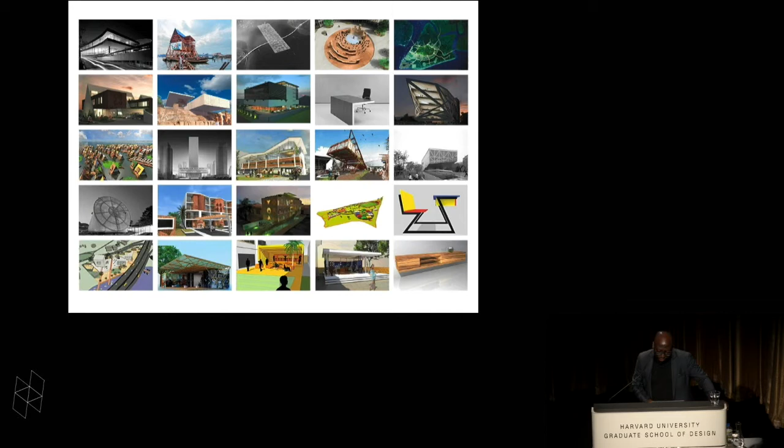So at NLE, we operate from 4 different fields: architecture, urbanism, research, arts and culture, and we have done several projects in different parts of the world, and some of these include my experience at OMA, which has really had an impact on the diverse ways I see development. So some of the projects I had the fortune to work on include these ones that Michael also mentioned earlier, and some of these are the projects that we're working on today.

But for today's lecture, I want to focus on one of the issues that really drive our office, and those are influenced by some of the most pressing challenges of our time, the challenges of inequality, sustainable development, climate change, diversity, energy, etc. And what role architecture and the practice of architecture actually plays in all of these complex issues. So in trying to understand that,

I think our first lens of investigation is really on sustainable development. And there are lots of definitions around what sustainable development means, but for us, this definition by the World Commission on Environment and Development is really the key thing, which defines sustainability as development that meets the needs of the present without compromising those of future generations. And if you stop to really think about what that means, it's really about responsibility.

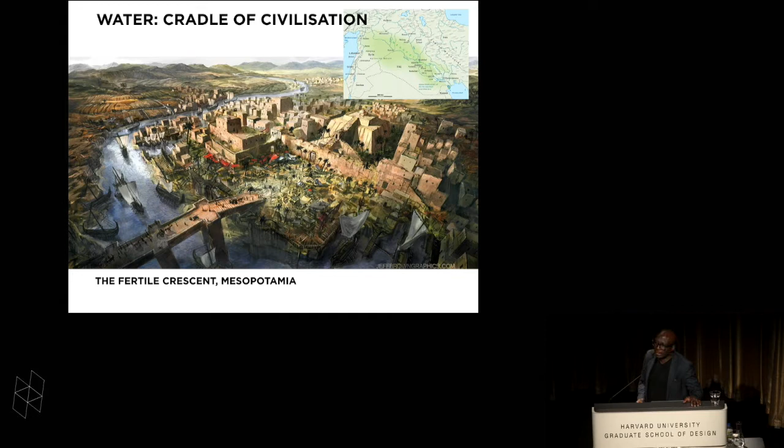However, when you put it in context and you begin to realize that two forces are now coming into play, that we're converging towards these areas by water, and that there is also a threat to those areas due to the forces of climate change, then it means that these points are important points of focus.

In 2011, again, we realized that of these cities, about 70% of the African capitals are also by water. And so for many that have not been to African cities, you might think it is all safari. And I'm sorry to disappoint you that you will not find most of that. And what you will see are important cities like Cape Town, Dakar, Dar es Salaam, Lagos, and they go on and on.

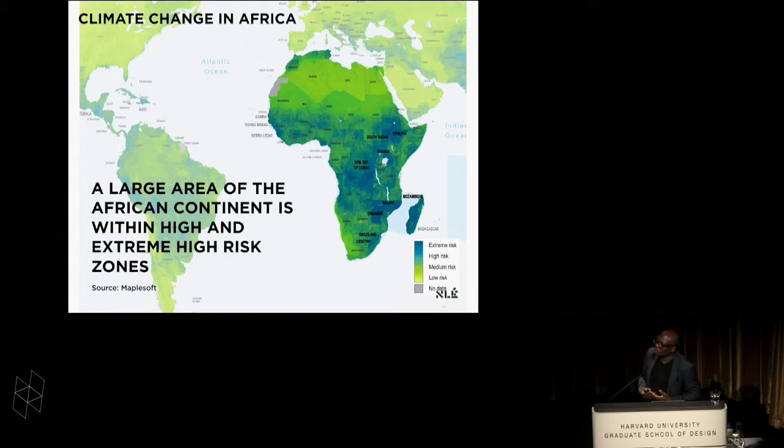So, as I mentioned, while Africa is the second most urbanizing continent in the world, it is probably the continent that is most affected by climate change, with a large area of it being within the high and extreme high risk zone, which means all of these dark areas are really at risk. So what you have is, again, a convergence of urbanization and climate change happening in these places.

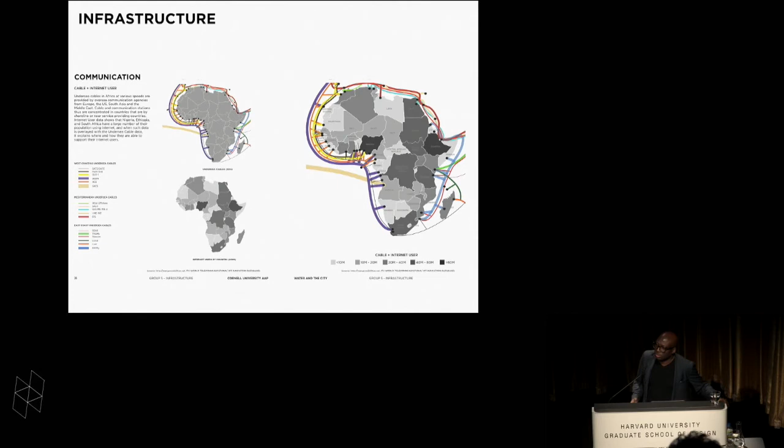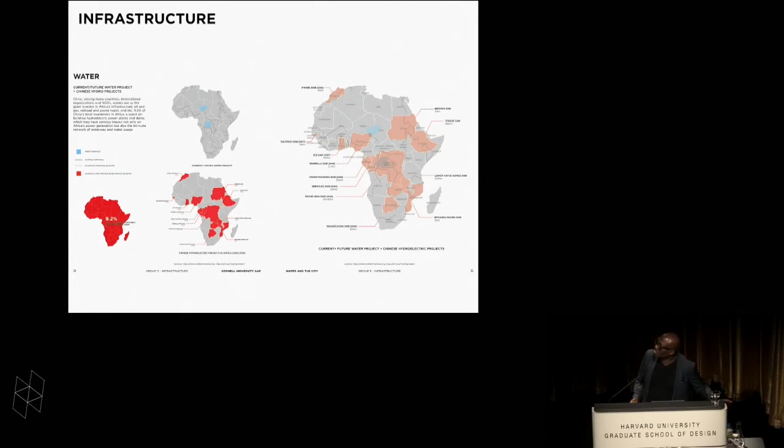Infrastructure: the communications, the network of cable connection and how the continent is being wired for internet use, and it's one of the largest markets for this. Of course, we've heard a lot about the leapfrogging opportunities with the use of the cell phone, but the continent continues to offer these kinds of connectivity. Water as a very important infrastructure, which really makes the continent a hub for many connections for transportation, ports, train tracks. So it's not a very connected continent; there are lots of gaps within the infrastructure that are yet to be filled.

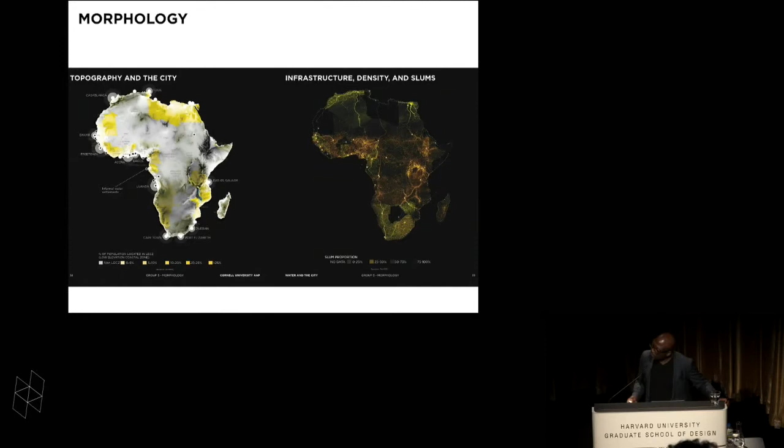Morphology: the diverse geographic and topographic conditions begin to constrain. This really explains how topography constrains or shapes the potential for development of any kind of city. So this is a map of the topography on the continent and the relationship of coastal cities along that. Again, morphology is a very important driver for the growth of cities, and that's why humans have always settled around water bodies, because that's a condition that is favorable to development.

Environment: one of the interesting findings here is that, of course, there's the tropical belt. Africa has one of the largest sections of the tropical belt of all the continents in the world, and this tropical belt is the area where you have one of the largest biodiversities and a lot of resources. So these are places of opportunities, and that's why a lot of resources are mined along this tropical zone.

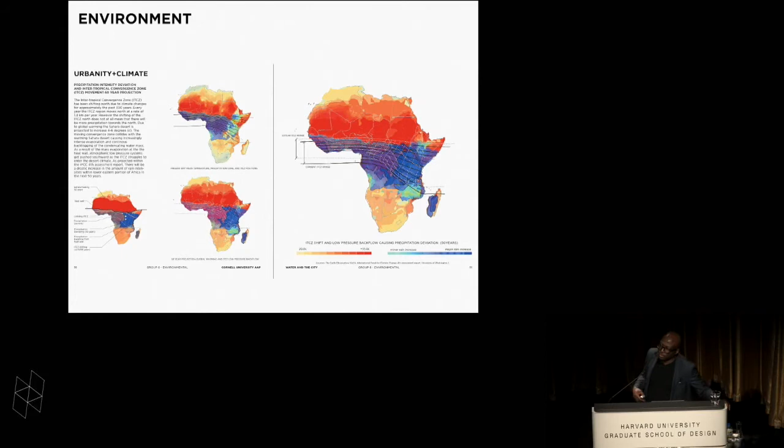But what we also discovered is that due to the forces of climate change, there is a southeast shift happening in the climate pattern. So there's going to be an increase in rainfall coming down towards areas like Dar es Salaam in Tanzania. The climate pattern will be shifting on the continent much more than we have seen, and these areas are going to become drier. That has a huge influence on which countries will be doing well and where you'll be seeing droughts in the next few years.

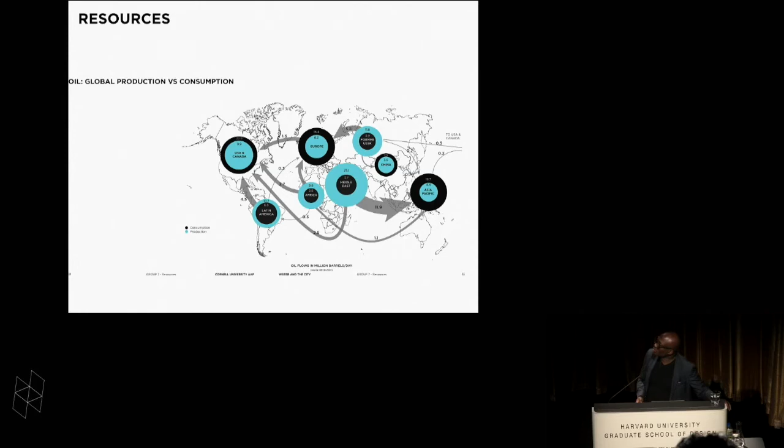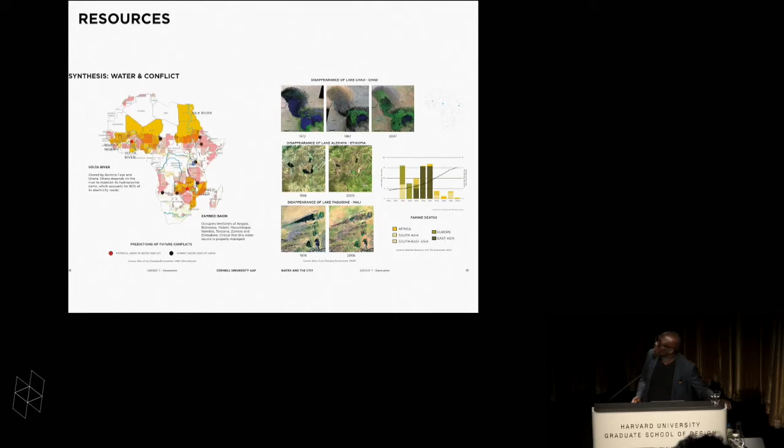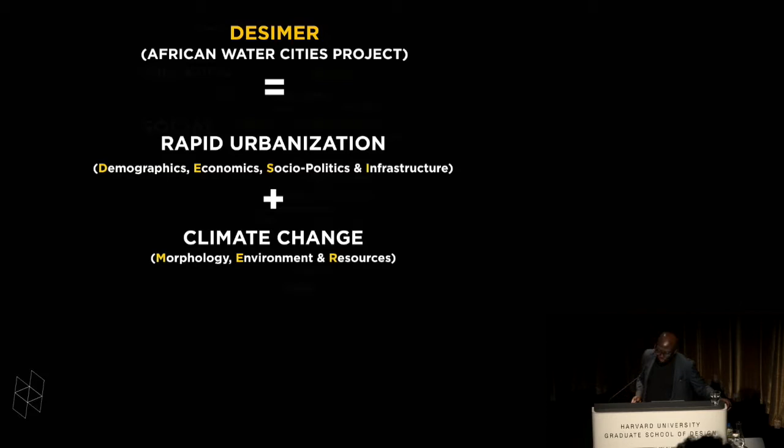Finally, resources. Of course, oil has played a very important role in transactions on the continent, and water is an important resource, where we're now seeing a lot more conflicts, more from water than even from oil. So finally, to explain the African Water Cities project, it's again about rapid urbanization, unpacked on the issues of demographics, economics, social politics, infrastructure, climate change, morphology, environment, and resources. It begins to elaborate how to understand all these challenges and perhaps opportunities if you have a much more multi-dimensional view of how things play out on the continent.

The result of all of this research is a publication that we're trying to complete now from the Cornell research in 2014 and 2015, and there are lots of design outputs also from the students. At the GSD this year, we are fortunate to be researching Durban with a team of 12 brilliant students working on several projects in Durban. One of the things we're doing is, again, using DESIMER as a tool for understanding the complex dynamics of Durban in South Africa.

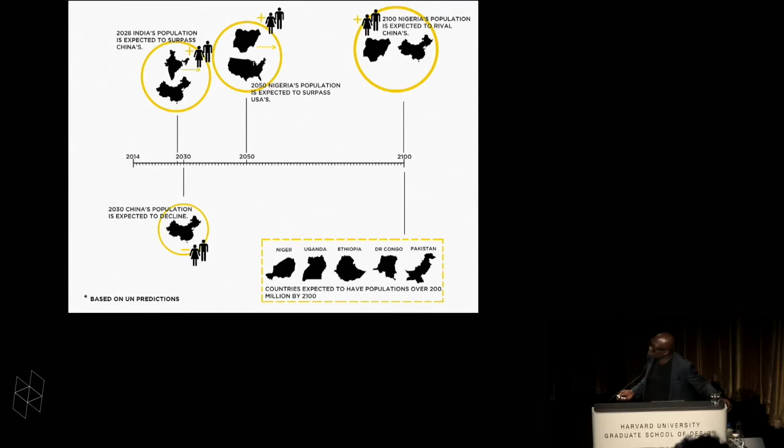So we began in 2011 with this urban research on Makoko in Lagos, in Nigeria, which is the largest country in Africa, with a population of over 170 million people. And it's expected to rival China's population by 2100. Of course, on the continent, these countries are also expected to have populations of over 200 million by 2100. Lagos, the commercial capital of Nigeria, is a city that is rapidly growing. The population is about 20 million people, and it's expected to be over 24 million people by 2020.

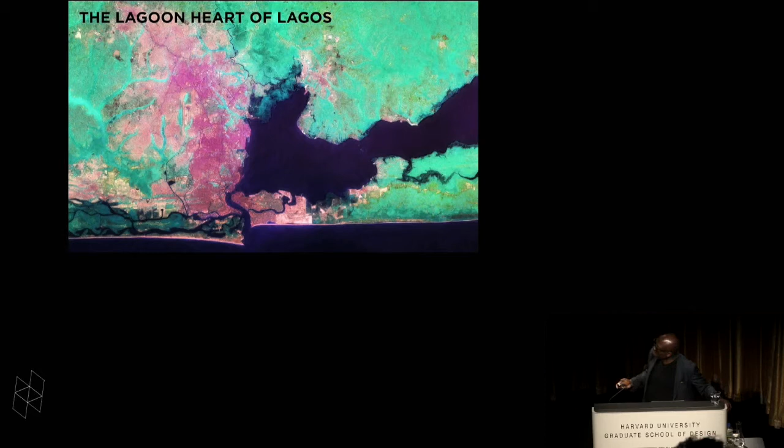It is a city by the Atlantic Ocean, where a large section of it is covered by water. Nearly 30% of its surface area is covered by water. It has a fissure that ruptures its surface. So it's a relatively flat morphology, but with a large body of water cutting right through the heart of the city. And when you look at the way the city is growing, there's a proposal to create a bridge that would connect these two parts of the city, which essentially would make the heart of the city just a body of water.

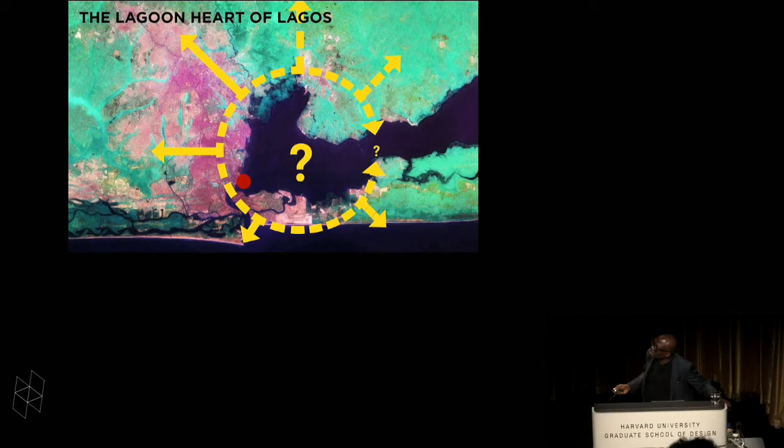And right at the edge of that is the emergence of a community that's called Makoko. Makoko is a community with nearly 100,000 people living with mostly no land, no modern infrastructure, and with very, very scarce resources. They have grown from a very small community, and they've continued to expand towards the waterfront. And for me, Makoko is a representation of maximum urbanization with minimum means. There's almost no infrastructure. The only way you get around is by boat.

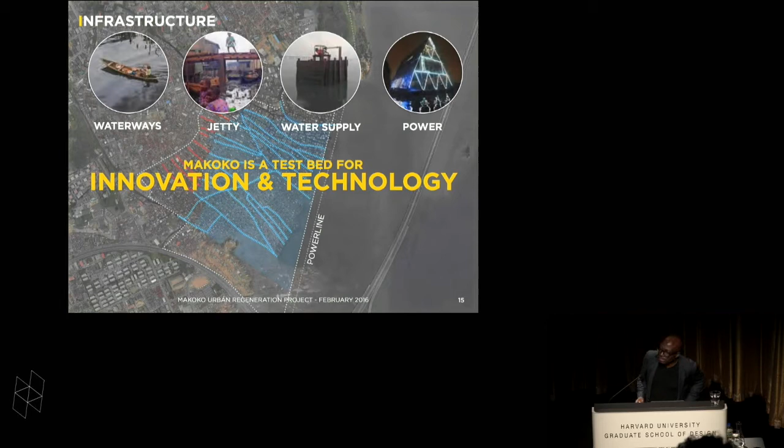Morphology, because of course it's a community that is on water. What seems to be very disorganized in terms of its settlement is actually, upon close inspection, a rather fine grid where all the houses are somewhat oriented in the perfect direction to allow for the best sort of solar protection. So you have the east-west direction, and generally the homes are oriented through years of trial and error in the most perfect way. So morphologically and the way it's planned, it's actually quite intelligent.

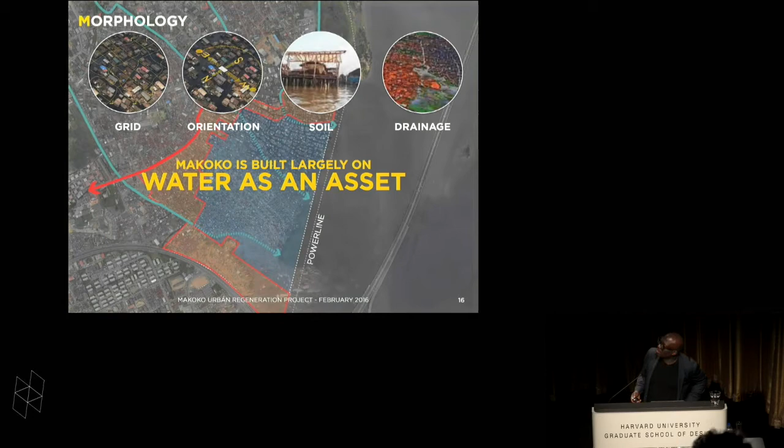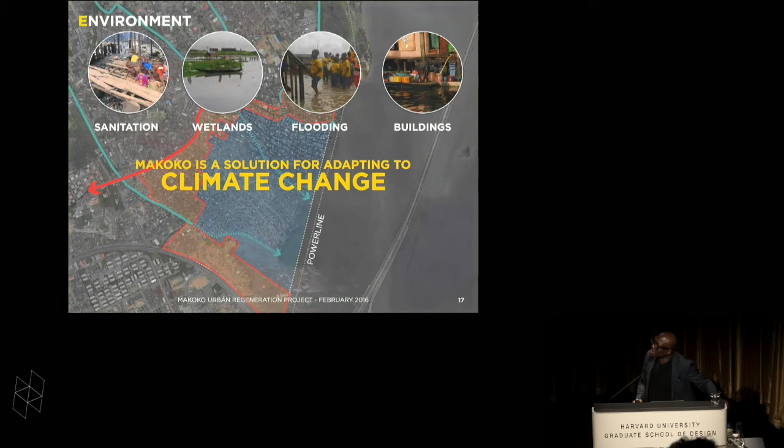The soil structure is poor, so you really cannot build very far and deep in there. So you can only build one or two structures there because the topography, the soil condition is very weak. Poor drainage issues. But generally, because it's built largely on water, we see water as an asset. The environment allows us to begin to think of this as a potential place to develop solutions for adapting to issues of climate change, and a place that has a lot of resources.

Primarily, they are settled there because they have fish. They fish and they provide timber. Nearly a third of Lagos's fish and timber supply are processed through Makoko.

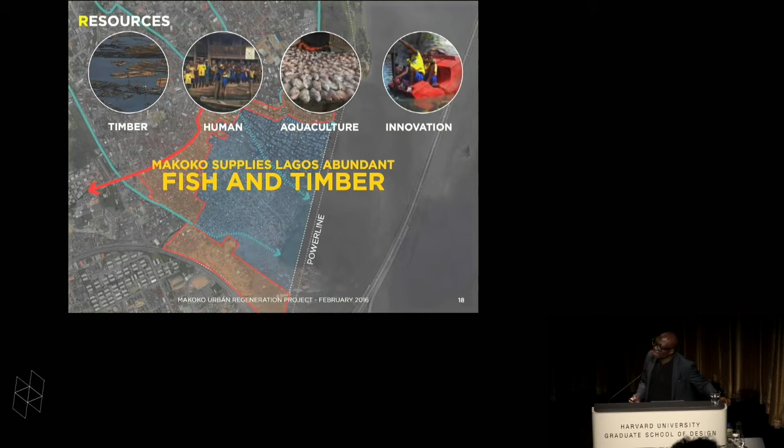So in 2011, 2012, I was researching affordable housing, and that was when I actually visited Makoko to understand what a basic dwelling meant. And I was both shocked by the conditions that I saw there, and at the same time very inspired by it. And I said, I would love to understand and learn how they built, and if we could work together to improve the conditions of building and living there, then it would possibly be beneficial to solve the more complex issues of legitimacy and tenureship that they had.

So we worked with the community through research and development to develop a prototype, which was a pilot project to create an innovative approach to address their social and physical needs, and to also address the issue of climate change, because they are fixed on stilts, and they began getting flooded because the tidal conditions were changing due to increase in rainfall in Lagos. And of course, Lagos is rapidly urbanizing, and land areas are becoming very, very scarce and expensive.

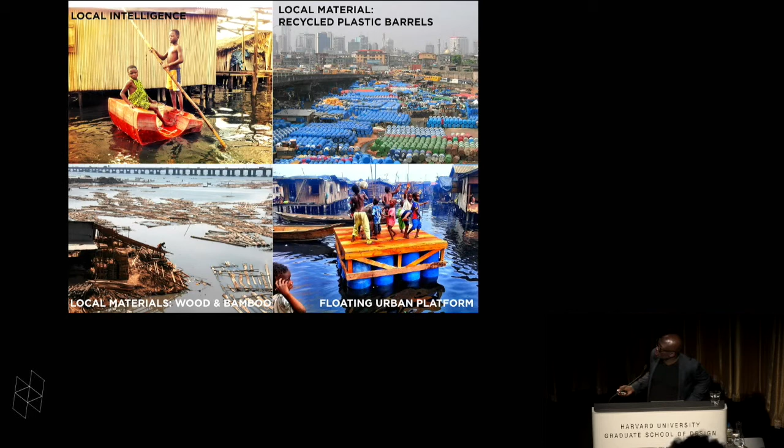A lot of documentation. We were supported by the Heinrich Böll Foundation with a small grant where we published 172-page documents, fully analyzing the community needs, and worked with the community to develop a solution which is a hybrid of local intelligence, of flotation, using used and found materials in the community, local wood and bamboo, which they produce, to create a platform that we scaled into this structure, which is a triangle.

And we use a triangle as a form because it is the most stable form for flotation and balance. It has a relatively low center of gravity and stability. And we built what happens to be the tallest building and the largest public space in the community, using the same material that they built with; everything around it was from no more than a 50-meter radius.

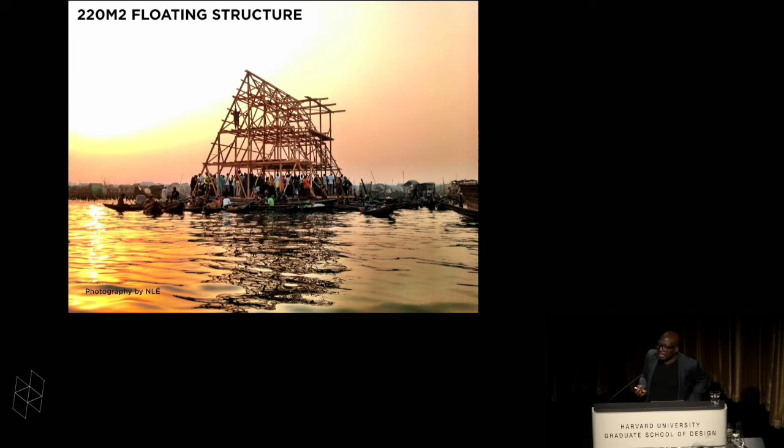We built it with the community, with local carpenters there, with like 8 men in about 3-4 weeks of working. And as you can see here, with the first platform, the kids had already jumped on it and they were having a great time. And when the main structure was built, they had the first Christmas party in 2012. Even as just very basic infrastructure, it was already in use.

It was used as an extension to an existing school, but also mostly functioned as a public space. So essentially, it's a floating structure. We're not saying that we've invented something completely different. Like I mentioned, floating homes, floating buildings have existed for many years,

but to build something 3 floors with 220 square meters, 10 meters tall, taller than anything in the community, with local materials, local resources, and 8 carpenters with tools no more sophisticated than a hand drill, is quite remarkable. And so this is just a way of working by understanding all the complex issues and the needs there. These are just images.

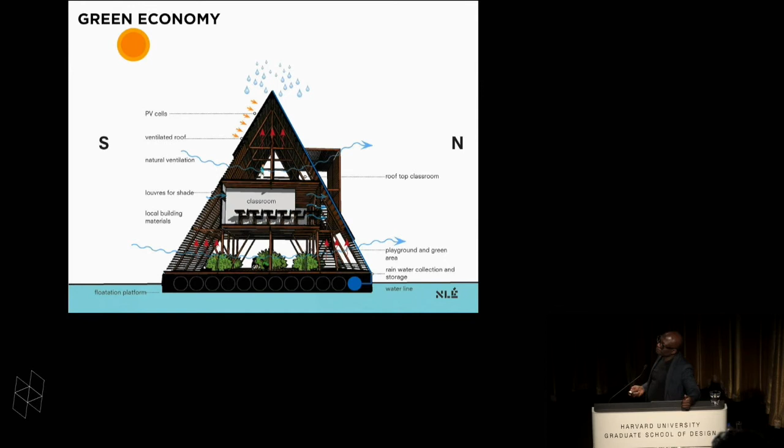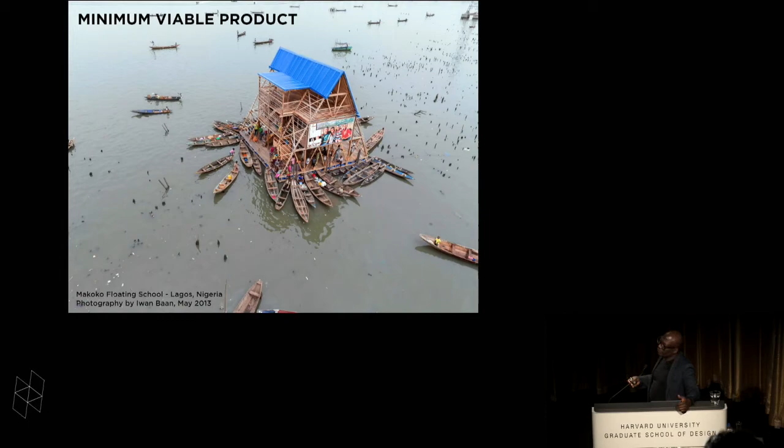And we built it really quickly at a time when the government began demolishing the community, to demonstrate to the government that, look, you could also begin to think about how to develop this place using ways that they are used to, but improving those qualities. And it was literally what you would call, in development terms, a minimum viable product. It was far from perfect,

but somehow it began organizing everything around it to be a little more perfect, making the community gain legitimacy, bringing attention to it in a way that allowed the governments to actually pay attention. And they were quite surprised that we had built it. And this is the building sort of in scale to the rest of the community.

And in fact, in 2013, one of the officials in the state said it was an illegal structure and it was going to be demolished. So we also became almost persona non grata, just because we had intervened with this project, and they were quite surprised by it. But we said, this is really just a prototype. You can test it, you can try it out, and they in fact did that.

They sent people there, and they said, well, you didn't get building permits, but technically, it's not quite a building, because it's not fixed, and it's not quite a boat. So we said, you don't get a building permission for a boat. And we actually got a mooring license from the National Inland Waterways Authority. So we had done a lot of research and understood that it really fell within a sort of policy gap of land water issues, of a typology that is not in the books.

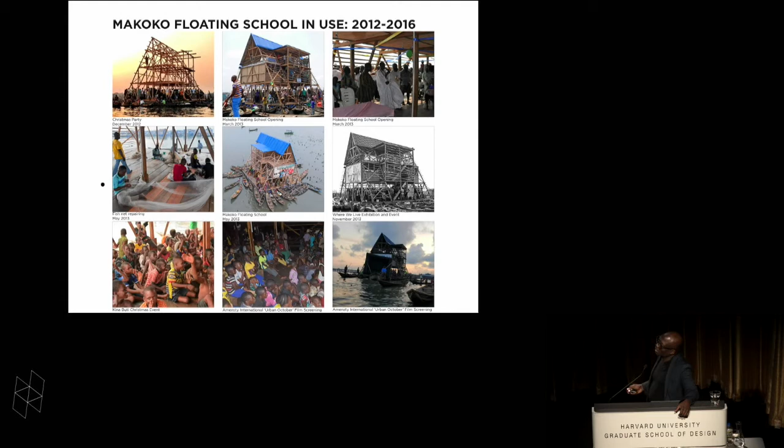There's no policy that would support this, and it's only recently that they began accepting this project. So it was in use from 2012 to 2016 for various things, incredibly used. We handed it over in 2015. It was used as a school. It was used by the community. In fact, it became a very popular spot where movies were shot at the location.

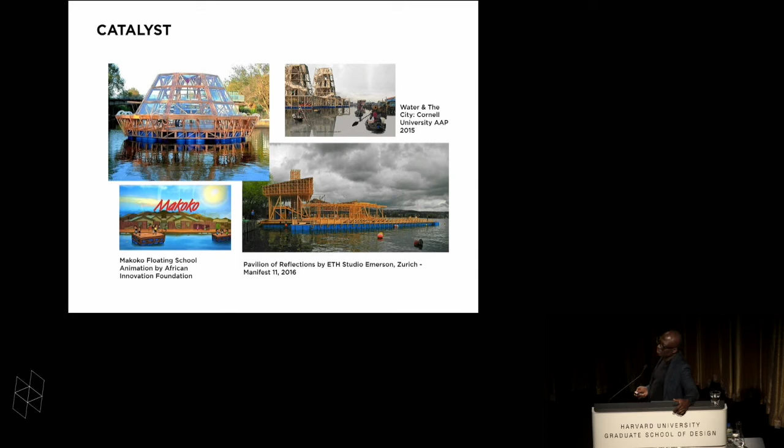Of course, it had a huge impact socially and culturally. It had a lot of attention, which helped give the community a lot more stability. We think it's influenced quite a lot of other projects around the world, I think as an educational tool or a source of inspiration. And in 2015, finally, the Lagos State government endorsed the project, and in fact agreed that they would redevelop the community as a waterfront community.

And unfortunately, after we had handed it over, the people who were in charge of it did not maintain it properly. I mean, I think to a certain extent, it's not something that you can blame anyone for, because generally this is a project that is new for everyone, whether it's the community or ourselves.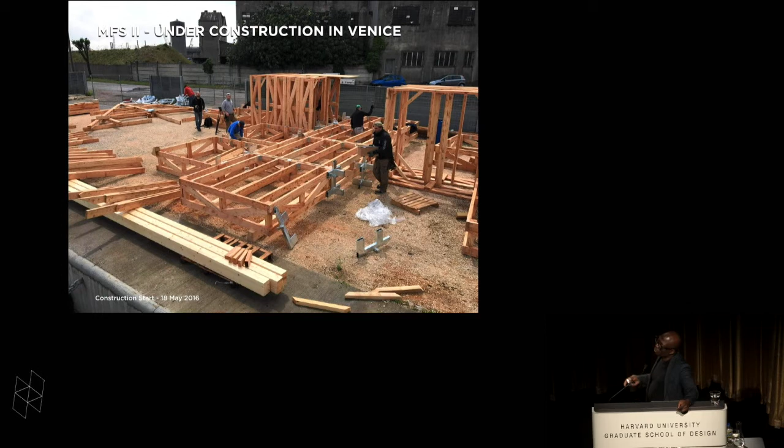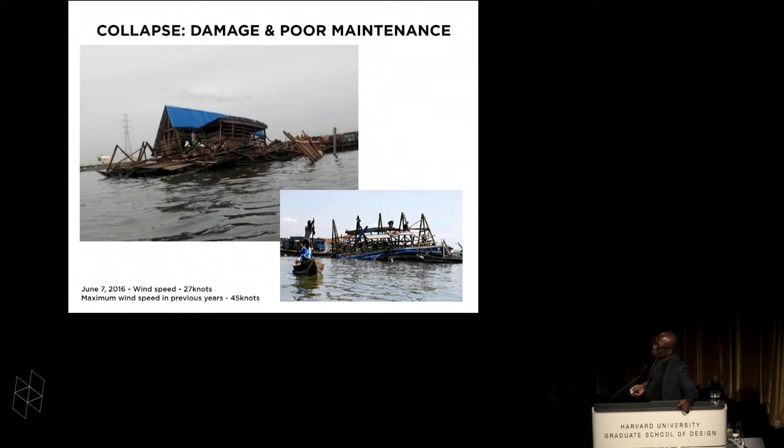It's all sort of an experimental project, and one of the anchors broke and it got damaged and it was not maintained quickly. And we decided to sort of shore it up, and we stopped using it because we knew we were building the second iteration in Venice, right at the end of May last year, and we were planning to sort of replace that one, and then it collapsed, and there was a huge media uproar about its viability, etc., and that it was knocked down by the storm, and all kinds of things.

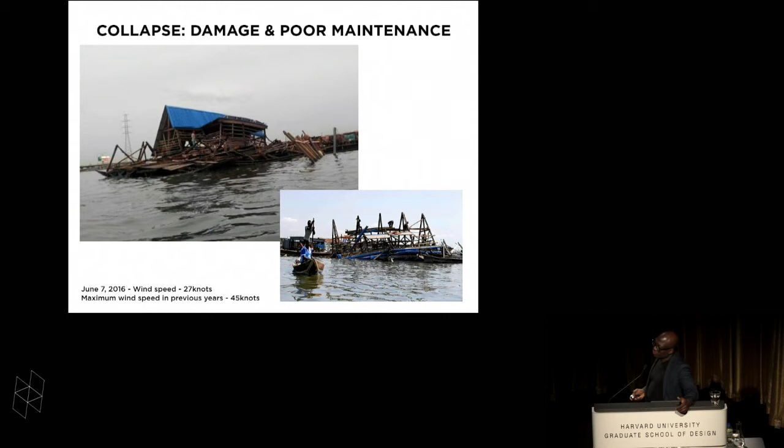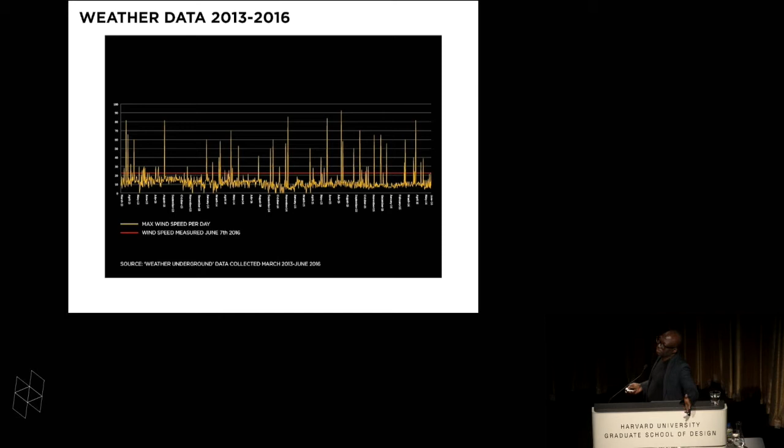But the facts are that we know for sure that the building has withstood a lot more wind forces over the last 3 years. We have all the data, and it didn't sink, it didn't get blown by the storm. It really just deteriorated and came down, literally just as we were planning to demolish it and rebuild it. And that's not unusual in that environment, and it's a culture that we're also trying to change.

So it's also sort of a behavioral pattern that we need to change, where they're very comfortable with conditions like this, where things are damaged and they keep living in that kind of environment. So part of this is also an education, where the collapse of the structure in fact began helping the community understand that they needed to take more responsibility to manage public spaces. So lessons were already being learned from even that problem.

And we see it not as a setback, but really as a moment to continue to be relentless. And any sort of innovation that has been successful has also gone through a lot of failures. So we accept that, we see the problems, and we've learned from it, and we're moving forward. And moving forward is this opportunity that we had last year at the Venice Biennale, where we built the second iteration of the project, which we called MFS2. And this is a collage of the school in Venice.

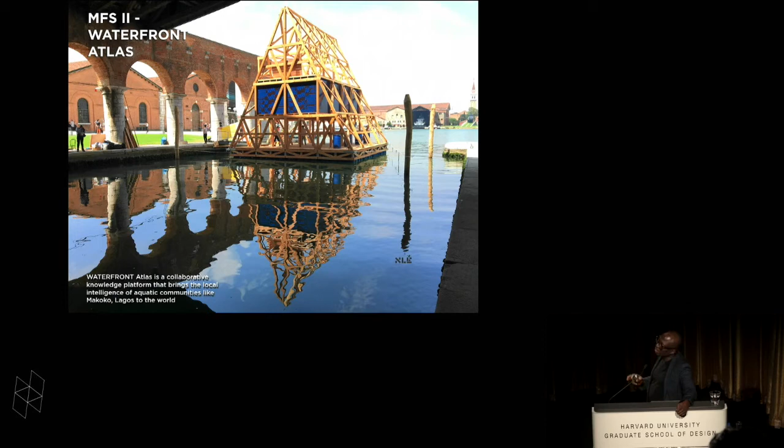What's interesting is that the first settlers of Venice are called Incolae Lacunae, which literally means the lagoon dwellers. So in a way, the first settlers of Venice were no different from the people of Makoko. They were fishermen and traders. So MFS2 in Venice got built in 10 days in a very different fashion. And the goal of MFS2 was to improve the technology, to improve this as a product that is prefabricated. So essentially, what we're trying to produce is a prefabricated floating structure.

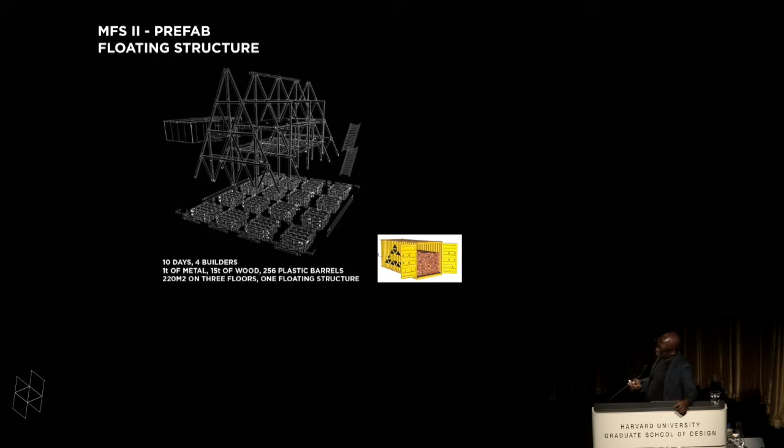It's not particularly about program, it's really about this element, this product that is highly developed, that you can assemble with very, very simple means, and all the elements are modular, and you can assemble and disassemble it and move it around. Now in Venice, it was built on land, and this is the irony of local context and the kind of dynamics that shape the way you actually get things built. While we built it on water in Makoko, in Venice, it was easier to build it on land.

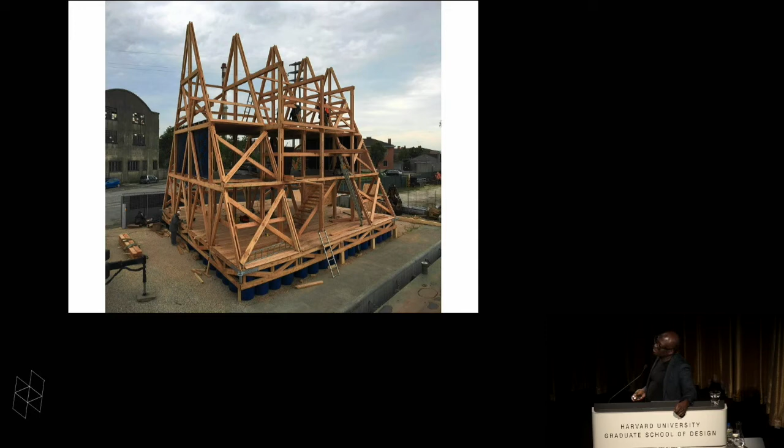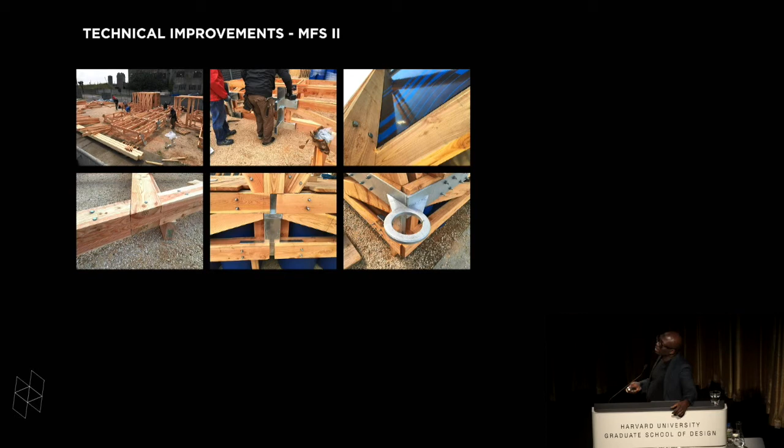And we improved all the joints, connections, used some steel elements, made all the connections bolted, improved the anchoring conditions, took all the things that we learned from MFS1 in Makoko and improved it on this one, and created a structure that was scalable and replicable, and you could easily manufacture it. And the idea was to be able to produce it in very limited time.

What's going on here?

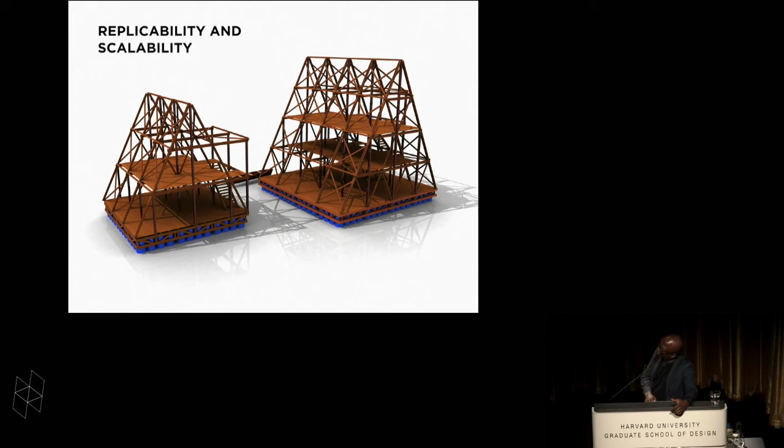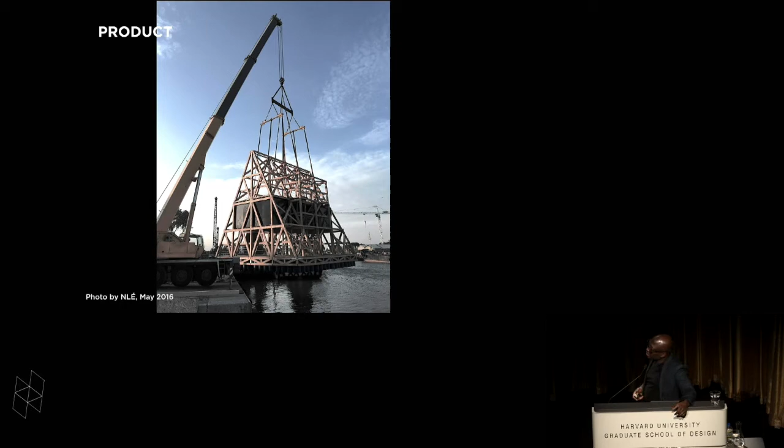Oh, yeah. So essentially, it's a product that you can literally just buy off the shelf is what we're working towards. At least you can order it and then assemble it with very limited skills. And someone reminded me yesterday that this image was actually quite like Bucky's transportation, and I thought it was quite funny.

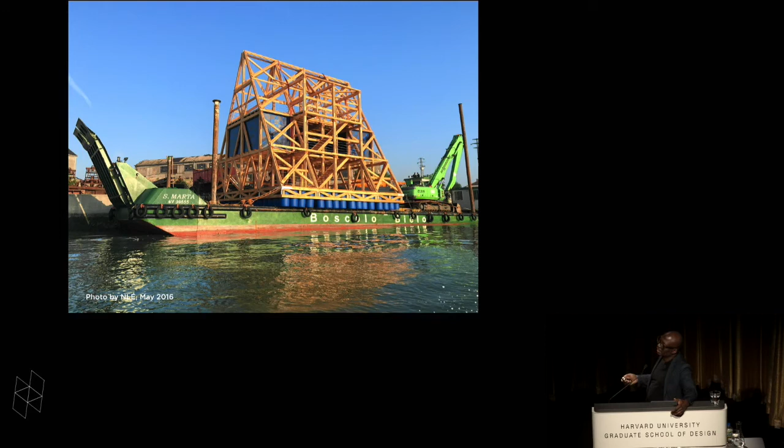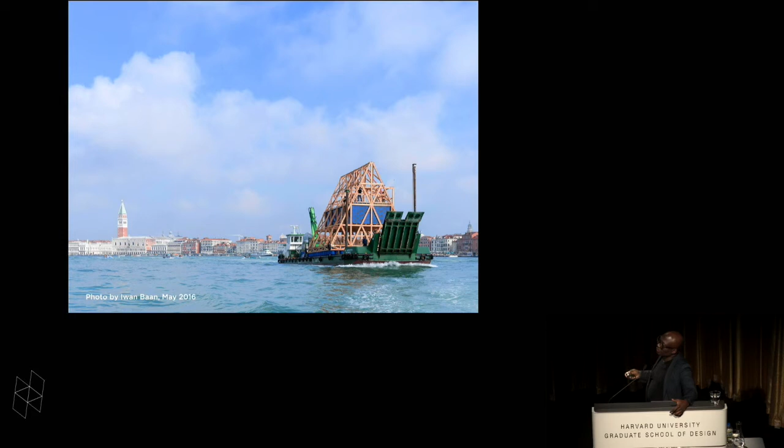But these kind of circumstances that allow... so in Makoko, we built this with very, very simple means. In Venice, the conditions of building are so peculiar that the logical way to do it was to build it on land and put it on a barge, and through this sort of heroic move, ship it across Venice, through San Marco Square. And again, someone reminded us that this is somewhat like Aldo Rossi and history repeating itself.

And you then realize these things you do when you don't intend to do them, because I was literally trying to build it the way I built it in Makoko. And I said, no, you have to build it by hand, you have to build it on location. But at the last minute, it just happened that this was the only way to actually build this one in Venice.

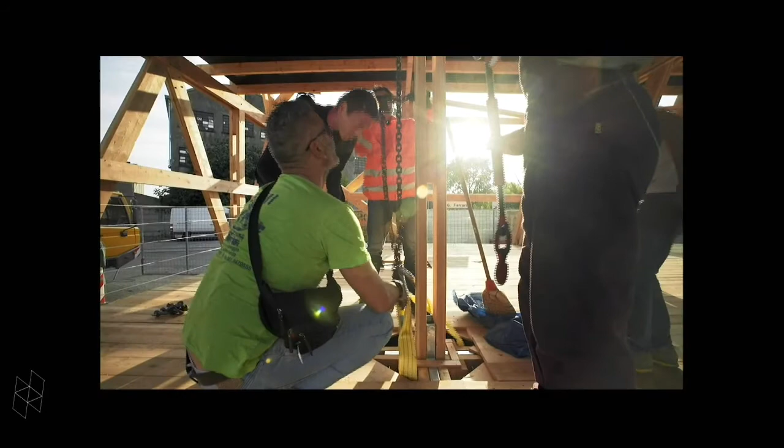So this: 4 men, cranes, machines, wall panels we developed through just using marine boards and screen printing, lifted into place.

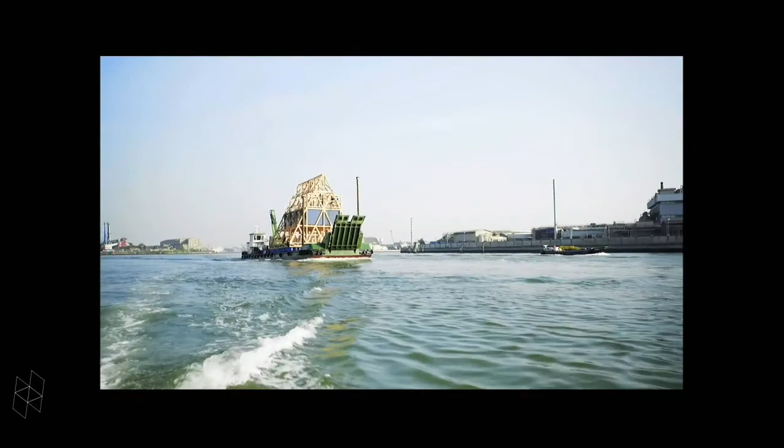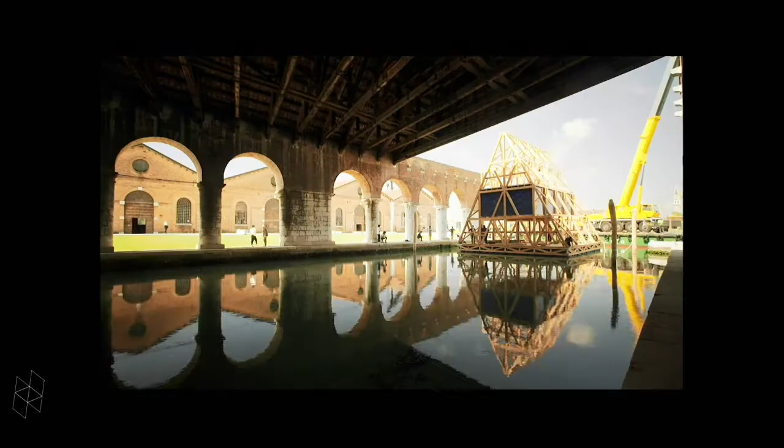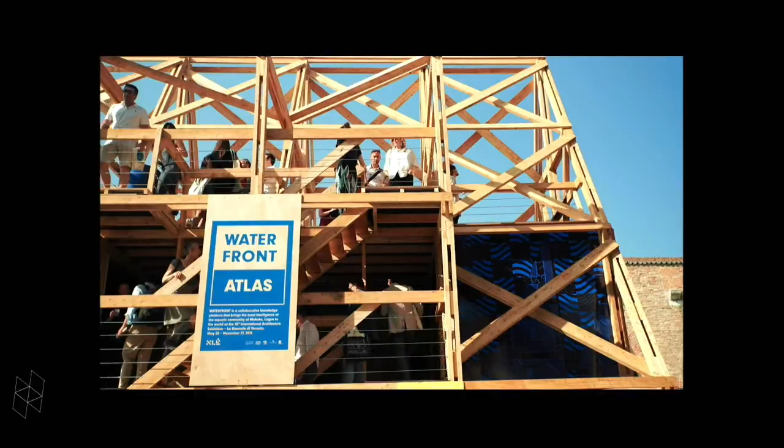And so it was used as an exhibition space for an exhibition called the Waterfront Atlas.

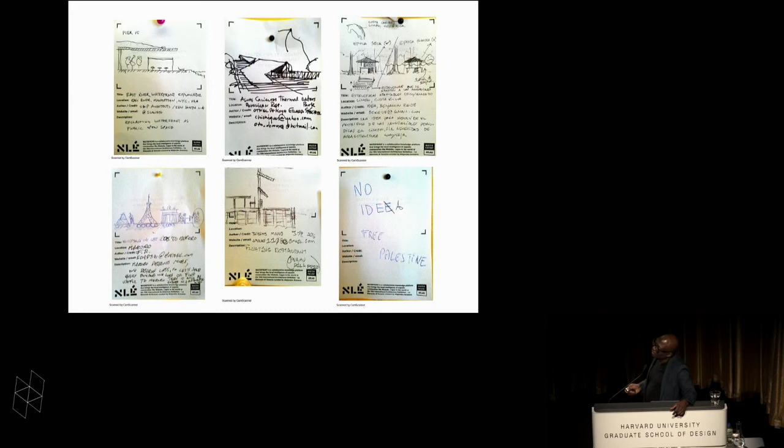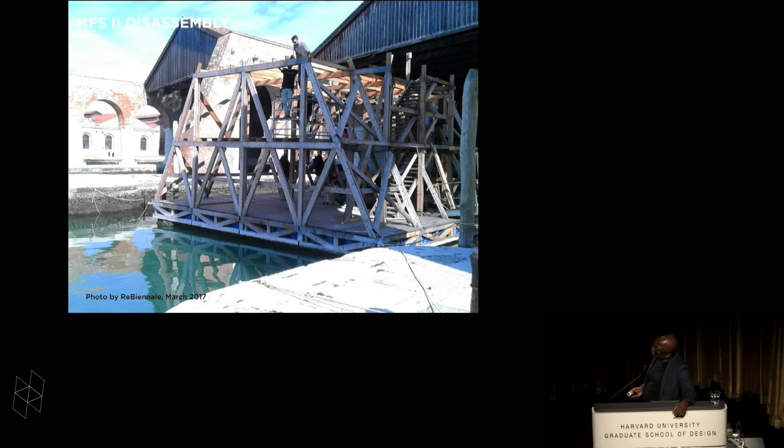And so these are some of the examples of the post-its, interesting projects from different parts of the world, from the US, from Mexico, and some had no ideas, but really important points to free Palestine. So we also collaborated with the World Building Institute by Alex McDowell, where they did a project called Dry Cities, and we had video feeds. And we were fortunate to have been awarded the Silver Lion for that exhibition.

And as we speak now, MFS2 is being disassembled in Venice, and the materials are going to be driven to Amsterdam to a storage facility, and we will be thinking about what to do with it next. So what's next? While we have MFS2 in storage as our classic model, we're already working on the next third iteration, MFS3, which would be launched in Belgium. We've been asked to produce the next one, but also now thinking about how to scale up this project into not just one, but a condition that would allow us to multiply this.

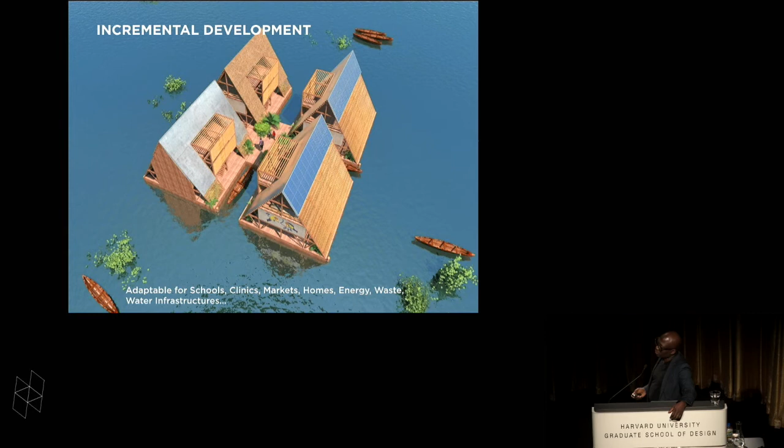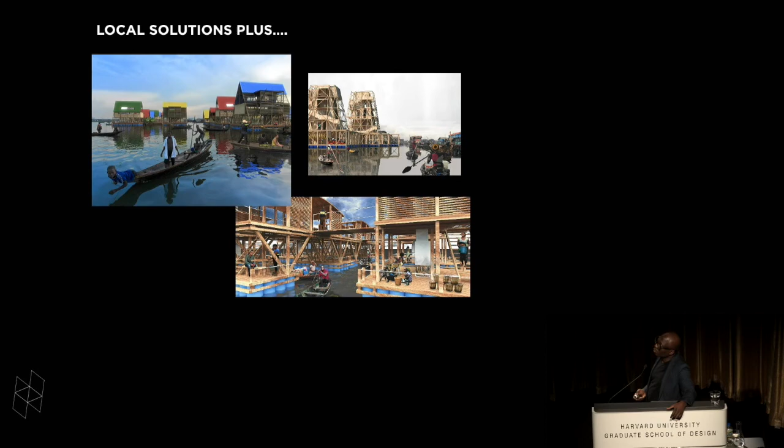A ministry, a parastatal of the Lagos State government has also asked us to give them a proposal for replacing the one in Makoko. And the idea is that you can adapt it for different uses, but we're not saying that this is the only prototype; there are other ways of building, lots of ideas of building locally, and also thinking of global solutions of the things that are relevant.

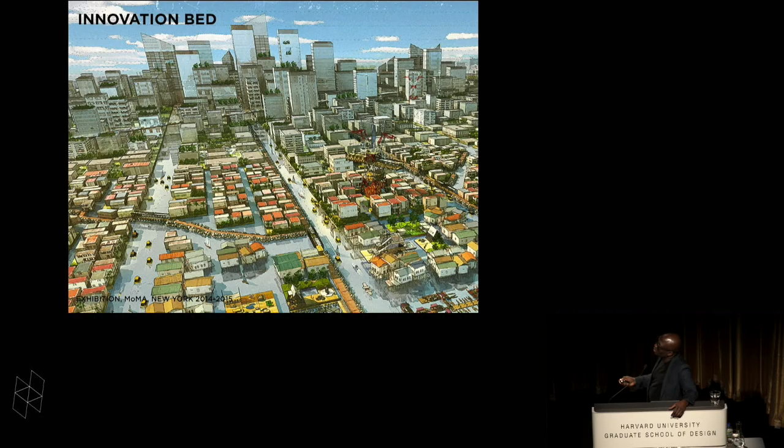To create a condition where we imagine what if we begin to understand very complex dynamics of things, and understand the opportunities and the learning points that we have seen in water cities like Chicago, Amsterdam, Venice, and Makoko, and begin to bring these together into an innovation bed where you have conditions that are local to the African continent, the African version of sustainable buildings with higher density, and as you move towards the periphery, you have conditions that are more similar to maybe Amsterdam or Venice.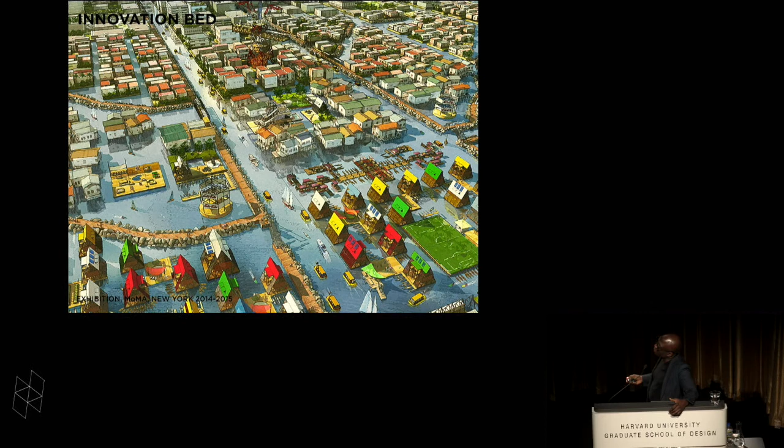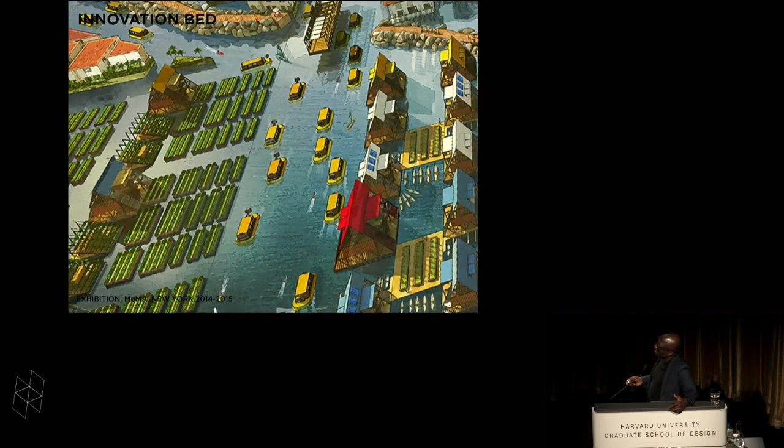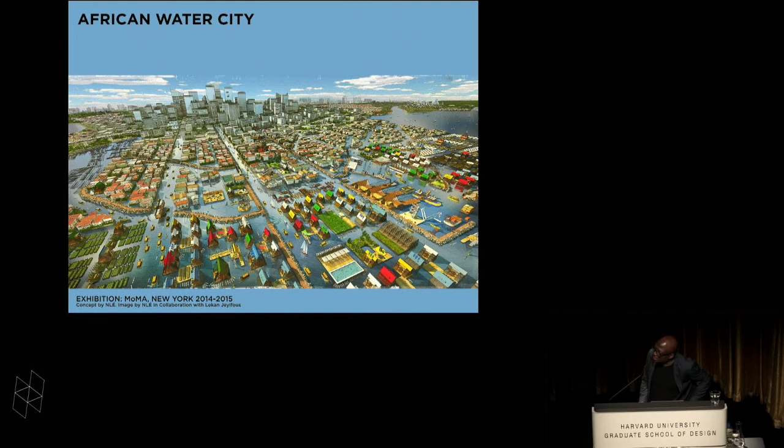And as you move away, you begin to get a lot more fragmented conditions and different typologies of building, not just a floating structure, but create recreational areas, create infrastructure areas. You might have a little swimming pool there if you want. You have some workspaces, you have agricultural spaces, and hopefully produce a vision of a new African water city that addresses the challenges and harnesses the opportunities of climate change and urbanization in our time. Thank you very much.

So Kunle will accept some questions and comments. Maybe if I could just begin. There was a moment early on when you showed the MFS1. I was thinking about the Domino diagram of Le Corbusier and how powerful and yet simple it was, and especially its scalability. The first time I went to Chandigarh, I didn't know this before, most of the commercial structures and business structures are actually Domino houses scaled up.

And then when you showed the entire cities made of MFS, I thought about that. But the big difference, at first I was wondering how you were going to bring all that research that you do into the design. And I realized for me, the moment everything clicked was this idea of the local intelligence in a full, robust way